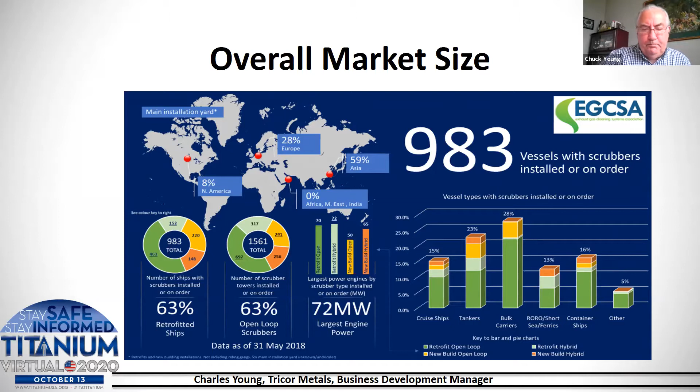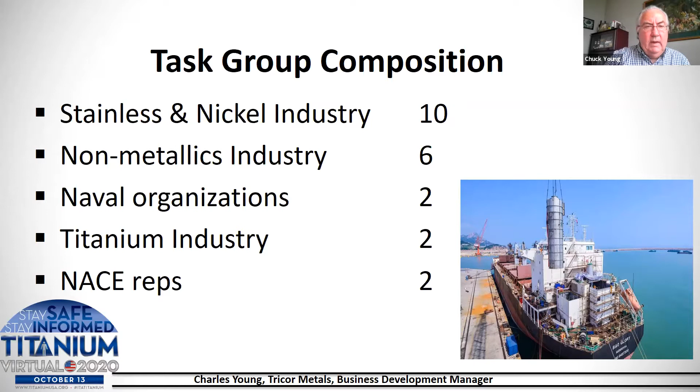Back in early 2019, when the task group was first formed, Bud Ross, who was the chairman, he used to be with Inco and now he's a consultant, put together an internet survey of ship owners, operators, and shipyards. And he got back 6 responses out of about 100 surveys that were sent out. So it's typical of a survey. You don't get many responses unless you really follow up on it.

Services for the scrubbers were fairly new, just installed, and up to 10 years of service. And if you look on the right side of this slide, you'll see where a scrubber is actually installed. It's installed right near the stack or in the stack. And most of the time that's right over the engine room. So if there's any leaks out of the scrubber system, it's probably going to go down to the engine room and cause major problems.

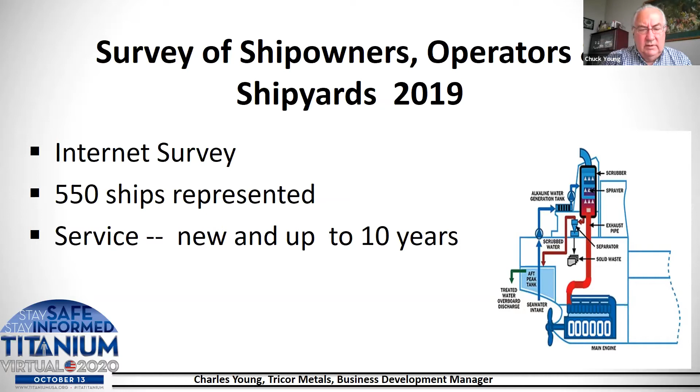Conditions in a scrubber vary depending on where you are in the scrubber. You have gases coming off of the combustion of the engine that are 300 to 450 C and very dry. And they come into the bottom of the scrubber, and they are then counterflowed with seawater or with seawater plus some kind of chemical like sodium hydroxide or magnesium oxide. Temperature in the scrubber goes down, but there is a wet-dry interface at the bottom of the scrubber where sometimes you have dry, sometimes you have wet, and that would be the major concern for corrosion in the scrubber.

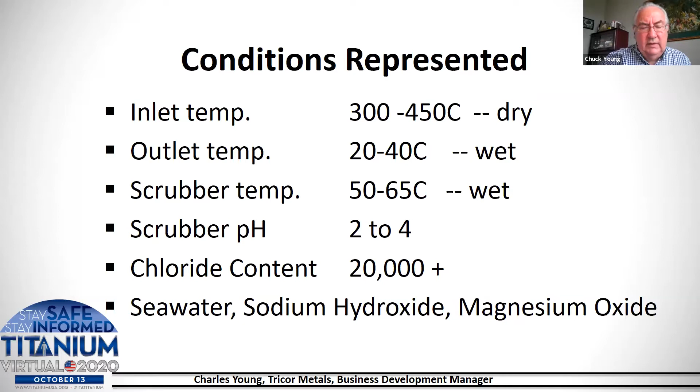Outlet temperature is normally 20 to 40 degrees C, and it's wet, but you still have scrubber pHs of 2 to 4. And because of the sulfur content in the fuel, this is going to be some sulfuric acid. The chloride content is going to be high because you're using seawater. Plus there's probably some chlorine in the fuel itself, so that you get 20,000, 30,000 chloride levels.

Materials of construction used, and these results are from the survey, so these are the initial scrubbers that were put in over the last, say, 10 years. And one thing to point out here is that these are all nickel or stainless alloys. It shows that the nickel and stainless industry is very well known in these types of markets, and it also shows that they try to use the lowest and least expensive nickel alloy first, and then they go up into higher alloys, just like they did back in the flue gas desulfurization market for coal-fired power plants back in the 80s and 90s and early 2000s.

But anyhow, the venturi and the inlet duct, and this may include where the wet-dry zone is, or the absorber bottom might be the wet-dry zone. But they're using a 2205 duplex stainless steel or a 2507 duplex stainless steel.

Some 6 or 7% moly like AL6XN or 254 SMO. Some alloy 59, which is almost equivalent to 622, and then C276. And one thing to point out here is that most of these materials of construction have been determined either in Europe or Asia. Very little of this is done in the United States. So that's why the alloy 59 is very prevalent here.

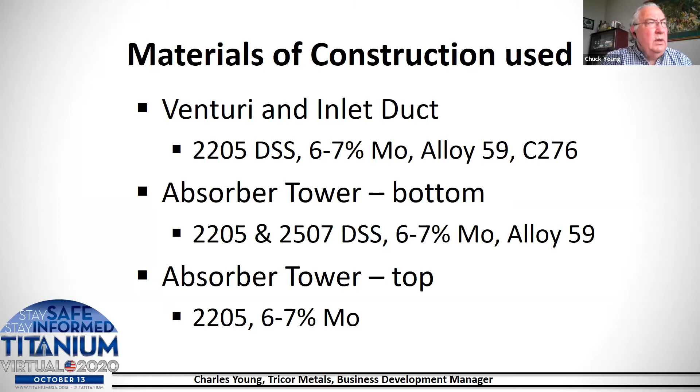This is survey results. One of the things that I asked Bud Ross to put into the survey, because I knew that no titanium had been used in this market, is why didn't the shipbuilders, the ship owners, the shipyards, and especially the scrubber manufacturers or scrubber design firms look at titanium? And we see the typical answers to a question of why don't you use titanium. It's cost. They say it's too high cost. They say it's not available. They don't have any experience with it.

One gentleman said that they have no experience and they don't know how to weld it in the shipyard, and they don't know if they can get welders that can weld titanium. And lastly was sulfuric acid corrosion. And these are typical responses when the nickel alloy and stainless alloy people have been talking. These are their talking points about why not titanium. So they have shown the industry that titanium may not be good, and these are the reasons why. So this is something we have to correct.

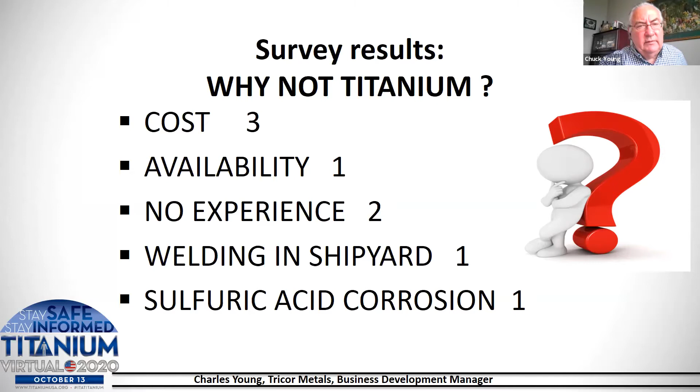In looking at the survey, there were a couple of failures reported. 2205 duplex stainless steel weld corrosion after just a little over 1 year, and a little over 2 years service, some 254 SMO, that's the 6 moly, crevice and weld corrosion. Now, the key here is 2205 has to be welded correctly. Otherwise, you get a change in the ferrite to austenite ratio in the weld or in the heat affected zone, and that could cause it to suffer corrosion fairly fast. So that's probably what happened here, the welding wasn't done correctly.

254 SMO crevice corrosion would be expected if you had under deposits in the scrubber, as well as weld corrosion because of welding problems. And again, that just shows, this is a Wartsila out of Finland there, where their scrubber goes and what it looks like.

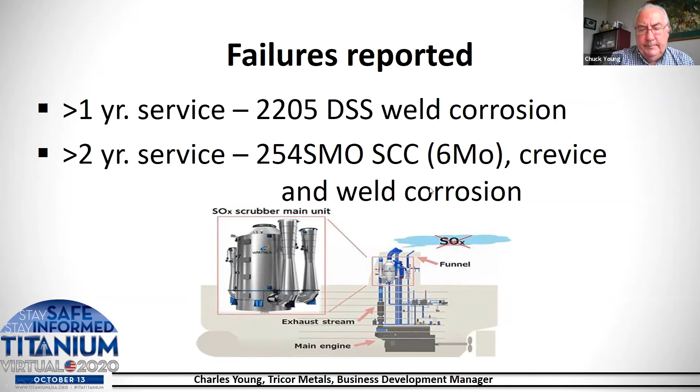The white paper, just to give you an outline, is going to first start with a description of an open loop scrubber, a closed loop scrubber, and a hybrid scrubber. I'm not going to get into too much detail on all of this. Just know that in open loop, the seawater goes through once and then goes out to the sea. Closed loop, it just keeps recycling until it has to be eventually put out to the sea after some treatment. A hybrid scrubber can do both. On all of these scrubbers, you do have to worry about when they are bypassed, because there may be times when a scrubber isn't operating. So you have the 300 to 450 C off gases from the diesel engines going right through the scrubber and up the stack.

Environments, of course, you have seawater, and you can have some alkalinity depending on whatever chemical you put into seawater to help try to control the pH. There is going to be a chapter on that. Materials of construction, there are basically four chapters: stainless steel, nickel alloys, titanium, and non-metallics. And as I said before, Rob Henson and I have worked on the titanium, and we are making comments on all of the other chapters as well.

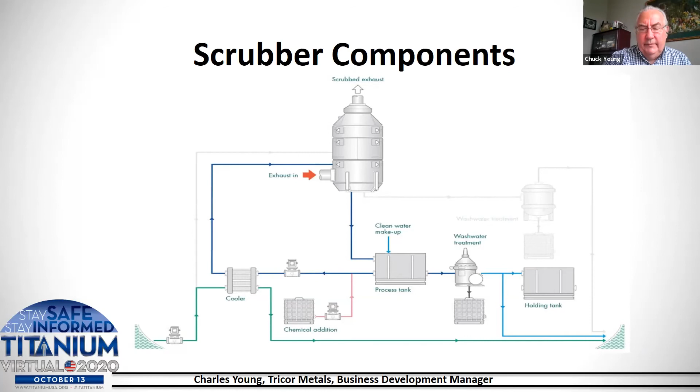Current sections, just to show you, these are the current sections on materials that have been done and have been reviewed. Stainless steel is 8 pages. Nickel alloys, there's a lot of stainless steel and a lot of nickel alloys, and they talk. So they're talking about a lot of those. We have 4 pages with 14 references. Those references are for seawater corrosion, as well as for the flue gas desulfurization work that was done back in the 80s and 90s and early 2000s by a couple of the titanium industry suppliers as well as fabricators.

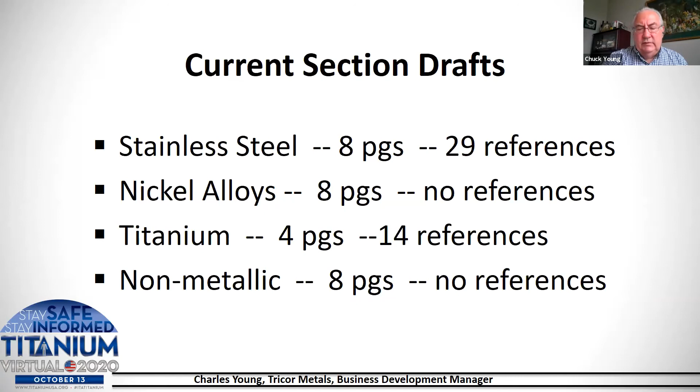And then the non-metallics. And I'm sure there's going to be references added to the nickel alloys and the non-metallic section drafts. But as I said before, everyone on the committee is going to be able to review all of these. We have reviewed basically the nickel alloys and a little bit the stainless steel. We're on the 3rd draft of nickel alloys, I think. We're on the 2nd draft of the titanium, gotten some comments back, and we've responded to those. So it's still a ways out.

Other sections, as I said before, the description is basically a generic description of the system. It doesn't go into materials. It doesn't go into what the corrosives are. It just describes the system. It should be fairly straightforward, and I think it is. Environments talks a little bit about the pH, about the chloride levels, they even get into some of the fluoride levels and that kind of stuff, and the temperature, and look at what corrosion could be expected there.

And then looking at the pitfalls in the design of these systems. We just received the initial draft on that. We're going to be reviewing that. That's going to need a lot of work, I think, just looking at it. So it's going to take a while to get that done. Service performance, there's really no draft yet on that, other than a very minimal 2-page that basically describes the 6 answers we got, which say that this scrubber was used for 10 years, this scrubber was used for 3 years. That needs a lot of work.

And then, as I said before, there's no draft yet on the best available technology, and that's going to be a battle to make sure that titanium is included in there. And Rob and I will see how we can do on that.

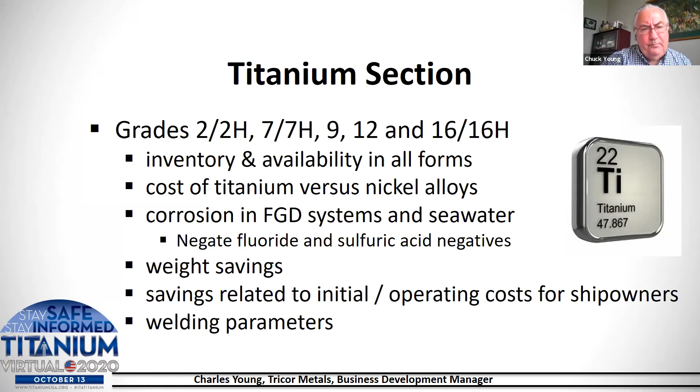But where do we go from here? Tricor Metals is based in the U.S. We do a little bit of shipping outside of the U.S., to Europe and the rest of the world. However, most of these markets are in Europe or in Asia. That's where the shipyards are. There's only one scrubber design firm in the U.S. right now. They're in New Jersey. All the other scrubber designers, even the ones who are getting some of their scrubbers built in the U.S., are in Europe or in Asia.

So we really need to get into those areas and into those scrubber design firms so that they put titanium as a proposed material of construction or as an alternative material of construction. This is both for new ships plus for maintenance, because the shipyards they're going to be maintained at are probably in the Far East, in Asia, or in Europe. So this needs to be a global thing, not just NACE in the U.S. or the U.S. manufacturers or the U.S. fabricators. We need the titanium industry as a whole, especially in Europe and Asia, to focus on this market.